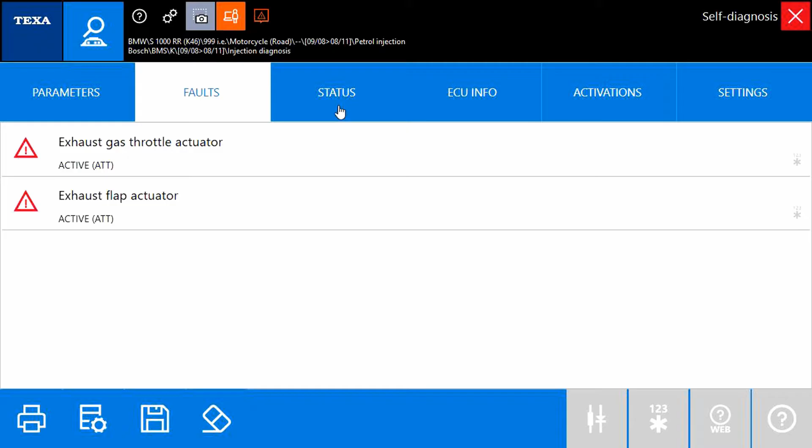So it's part 2 of our BMW S1000RR demonstration. So we're into the statuses on the petrol injection system. We can see all the statuses of all these switches on the system. So clutch switch, starter switch, brake switch, side stand switch, and all the other systems we can see there in their list. Those are displayed and shown as to whether they're active, not active, pressed, not pressed, open, closed, up, down, all those kinds of things.

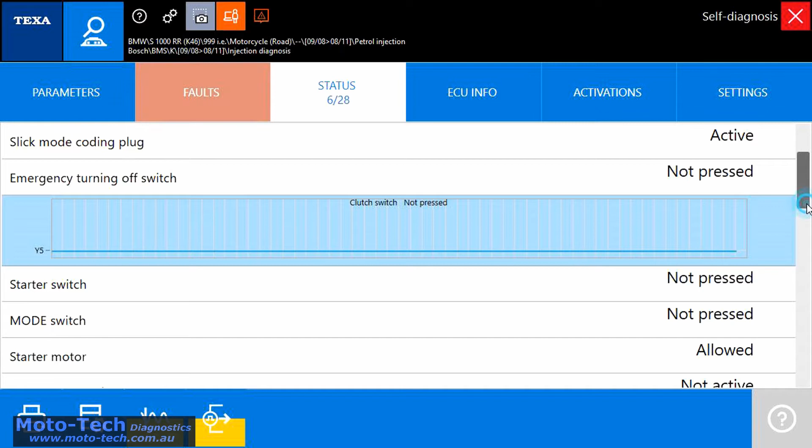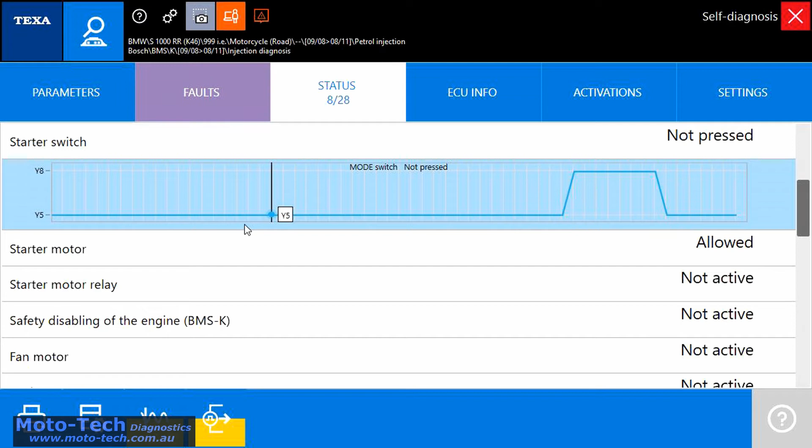And we can see them in a text format, or double click on each line and you can see the graphical display, which just makes it easier for you to see that. So if your bike is not quite next to the PC, you can just wander over to the bike displayed in graph mode. In that example there, press the mode switch on the handlebars and you can see that the button is working quite easily by looking at the graph rather than the text, which may be a little bit more difficult to see.

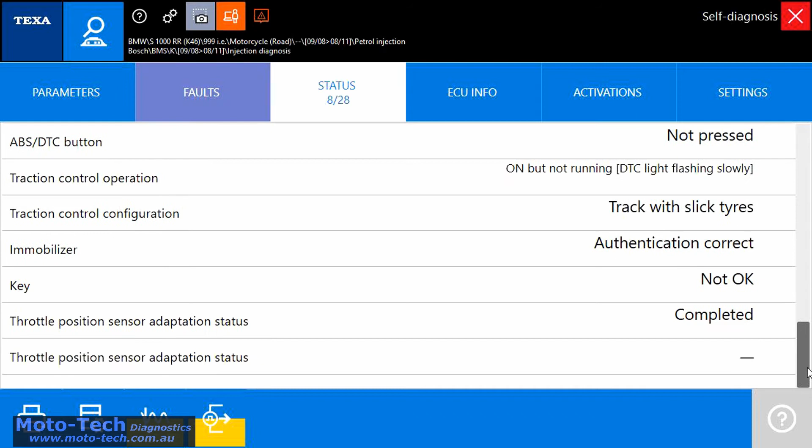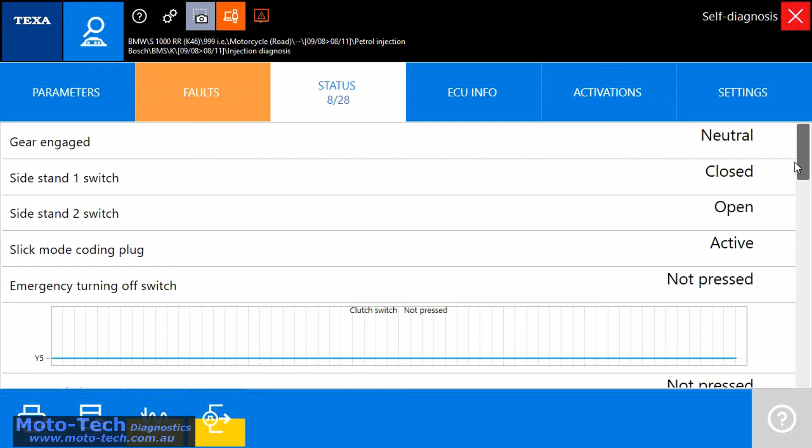And we can see all the different information there. So we've got 28 statuses in total on this particular bike. So we can just see very easily whether or not these switches are operating correctly. That could help you if you're trying to find a particular problem, that something is not actually working, and make sure the status is correct for it.

Or it could be something like an intermittent side stand switch problem, which may just show up when you're riding the bike. So you could just grab a bit of the loom and just see if there's an intermittent contact on that and see if that shows up on the screen. So a very quick, easy way of testing all these statuses and switches.

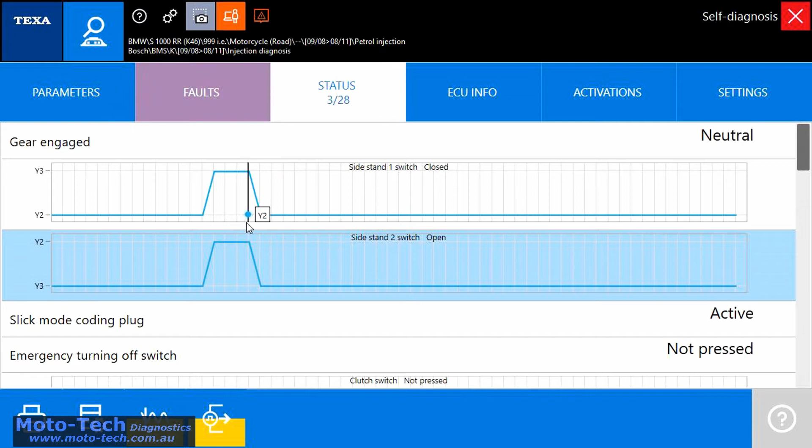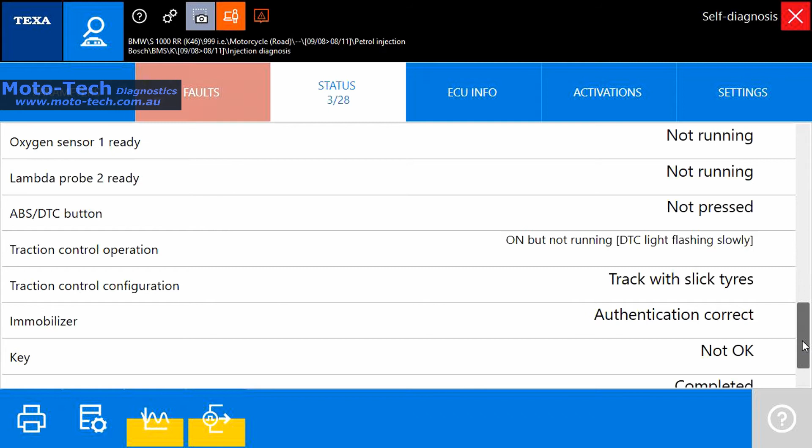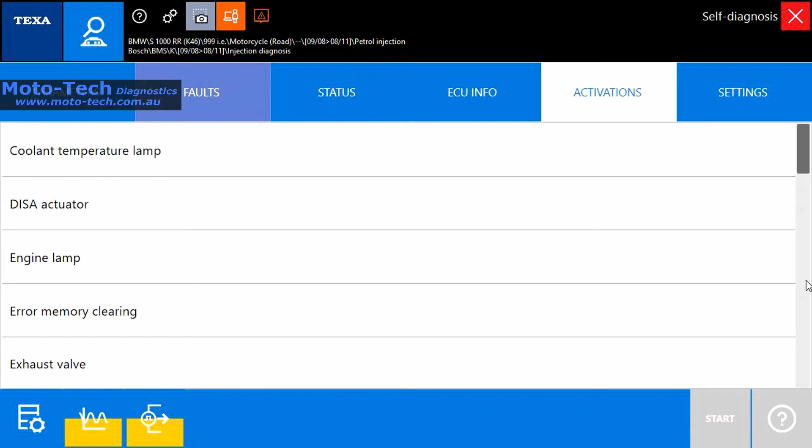We can see all the different modes selected as well. Then we move on to the ECU info, so it just gives you some data about the ECU itself. And then we can click onto the activation. So these are areas where we can turn things on or off to test them, perform any system activation, basically to check components are operating.

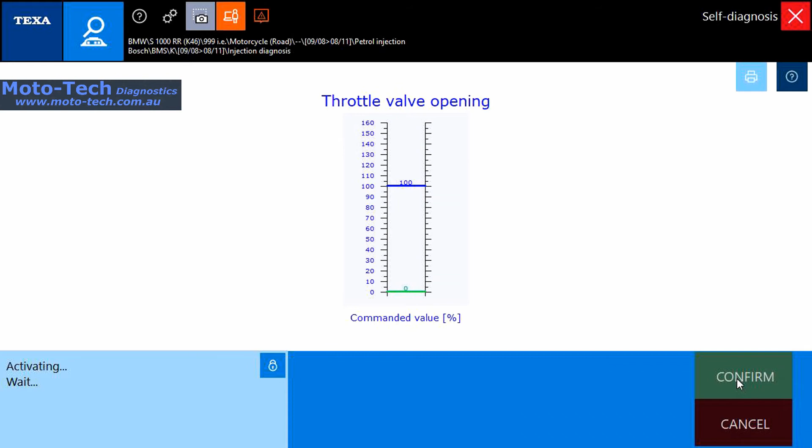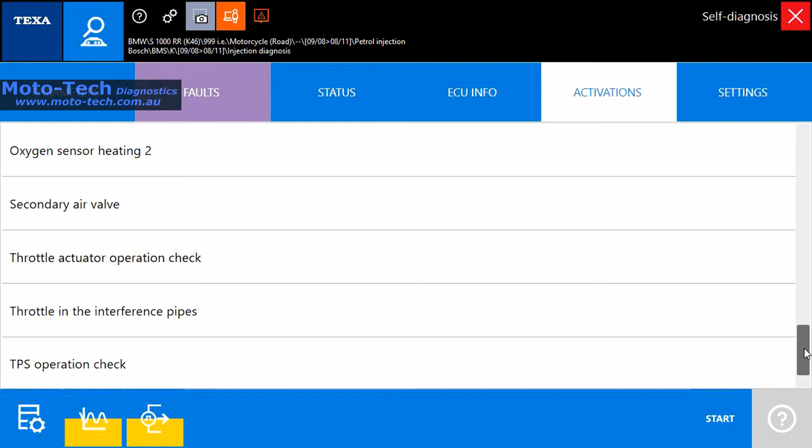So down the bottom there we've got a throttle actuator operation check. So this is a very simple check, you just follow the procedure. The display didn't show up very well on the screen recording, but as you open the throttle, that goes up to 100% and back down again and just confirms that it's operating correctly. So that's a very simple check just to make sure that the throttle is working completely throughout the range, just to ensure there's no issues with the throttle potentiometer.

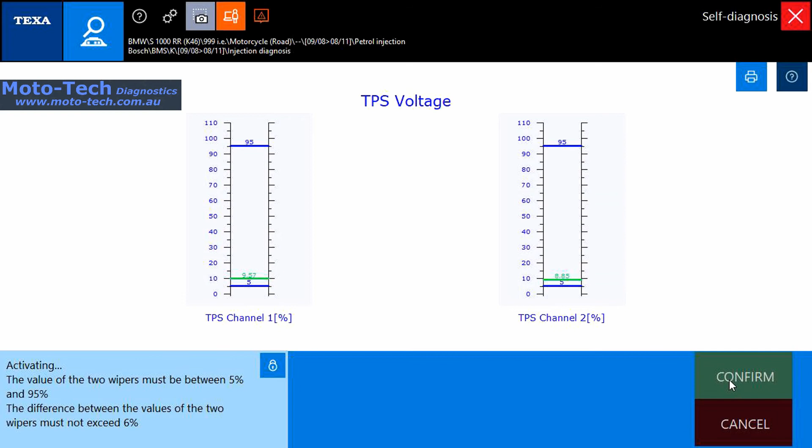So we've got actual TPS voltage, so on these TPS systems we've actually got 2. So they confirm basically that each one is working correctly. It's just a more accurate way of doing it. Previous older models would just have 1 TPS voltage. Newer ones will have 2 or maybe even 3 in some circumstances.

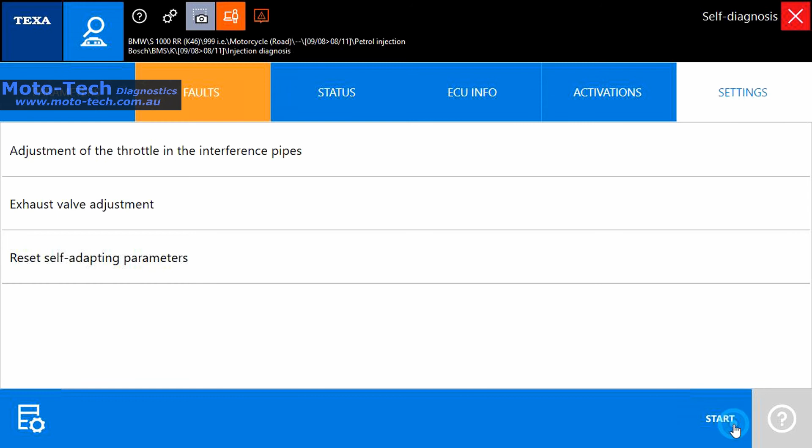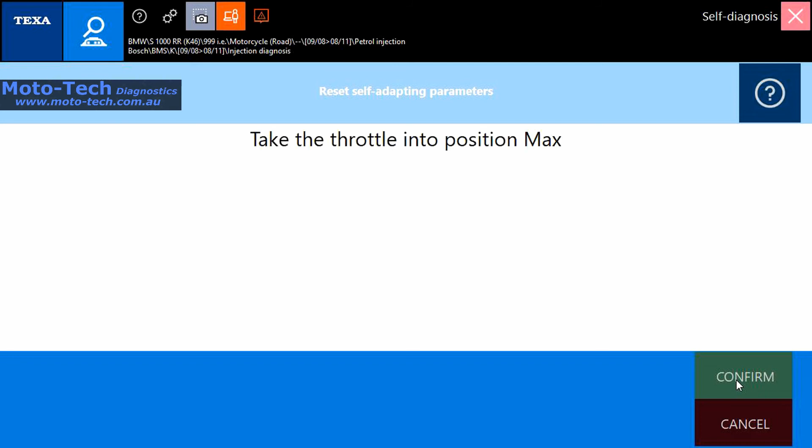Then we're on to the settings. So we've got self-adaptation, parameter setting. This can vary from bike to bike, model to model, as to what is actually being reset. So in this one it's just for the throttle in this particular instance. So what we're doing here, I'll just wander over to the bike, grab the throttle, open it up and just follow what it tells me to do on the screen.

Turn the ignition off, so that latches the new information to the ECU, so it then records the correct position. So voltages will just drift a little bit over time, so it just makes the whole fueling much more accurate.

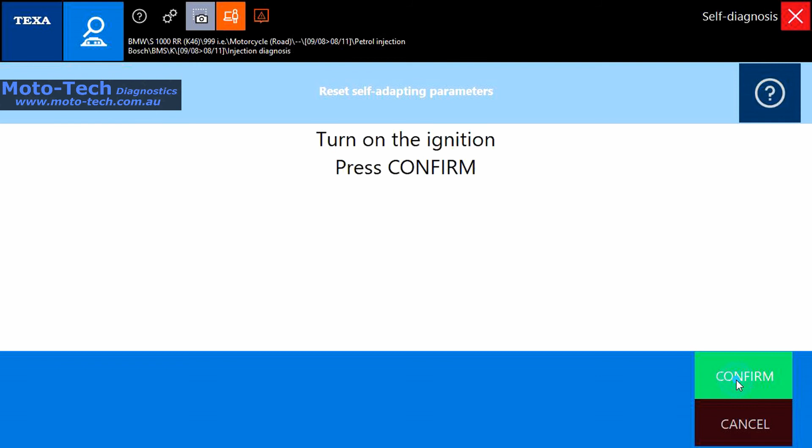And then this is just an adaptation value for idling. So you're starting the engine, run the motor at idle, and it will just check that everything is happening as it should and adjust any adaptive values that need to be adjusted to keep the bike idling at the idle speed required.

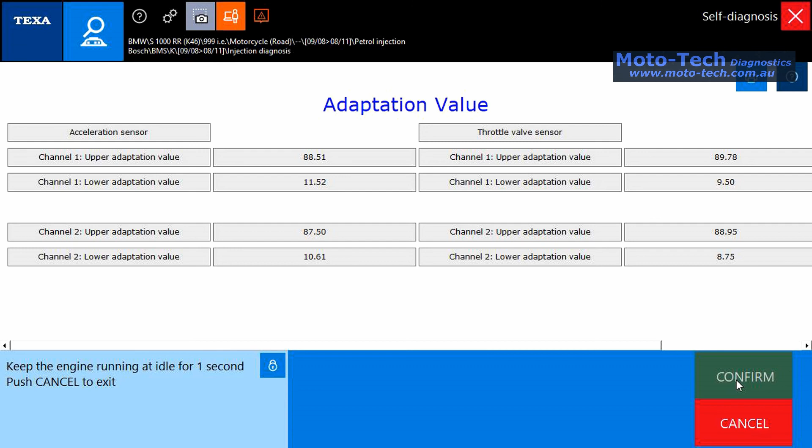So we just start the motor, we can see it counting down, keep the engine running for 10 seconds and it counts down. And then we're at 0, turn engine off. That is all that adaptive idling all preset. So that was part 2.